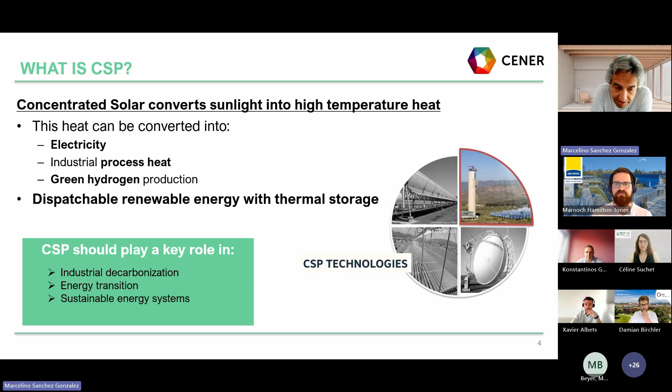So I really believe that this technology should play a key role in industrial decarbonization, in energy transition, and in the future sustainable energy systems. Why do we believe that solar towers are the technology that has more potential? Well, this is due to its features. In solar towers, we have higher concentration ratios, which allow us to have higher temperatures, and with higher temperatures we have two things: high conversion efficiency and also better energy storage.

In the case of the energy storage, we can store much more kilowatt hours at high temperature with the same volume, with the same, let's say, capital cost. And we have low cost and massive energy storage, that in our case uses molten salts mainly, and other materials. We are using environmentally friendly storage systems. And we can dispatch electricity during day and night.

What is the strategic value of CSP systems? We can provide the grid flexibility with the storage, but also reliability. I want to emphasize that we are using synchronous generation in the same way as any other power plant, nuclear power plants, and also coal plants. So we are providing the same kind of quality of electricity to the grid.

And as I already told you, we are using high temperature for industrial heat. We can produce hydrogen, and we have this environmentally friendly storage. So CSP tower is a unique technology that combines renewable generation with large-scale energy storage, which is critical for the energy transition.

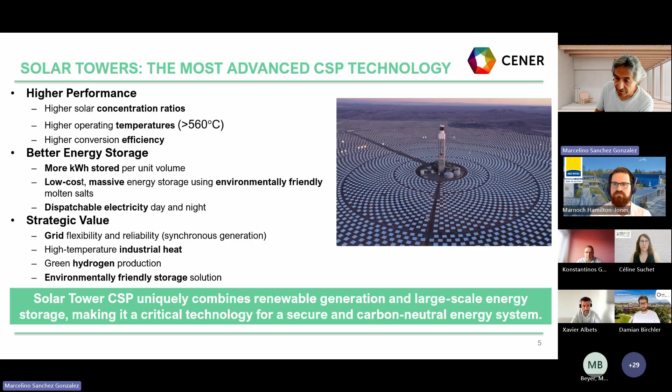Why do I believe that CSP is a good digitalization testbed? The solar towers are very complex. We have many heliostats, thousands of heliostats. We have to deal with thermal and optical interaction. We have to control this in a dynamic way. We have plants that are very data intensive with multi-physics. So we require advanced sensors, artificial intelligence prediction, digital twins, and real-time analytics.

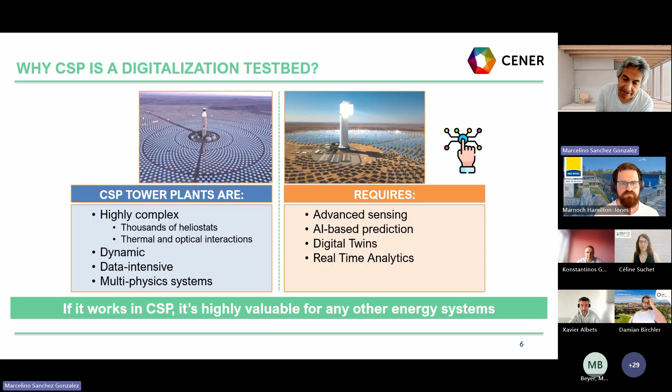If it works for CSP, it can work for any other energy system to be integrated in the energy transition. With digitalization, we are going to have smarter operation, lower operation and maintenance cost, higher reliability, better grid integration. We can provide industrial decarbonization, and in general, we can have a smarter energy transition.

Well, for me, digitalization is not only about handling data or even making digital twins. It's about having 3 layers. For me, one layer is measurement and monitoring. We need to have better sensors, better monitoring of the plant. We need to know how the plant is at every moment. We also need the modeling, to have the physical and performance models, the digital twins, and also the degradation model.

And finally, we have the decision making, with all this information to take decisions, where we can have machine learning or even predictive operation and maintenance, or also optimize the dispatchability of the energy to the grid. So to me, the value comes from the integration of all these layers.

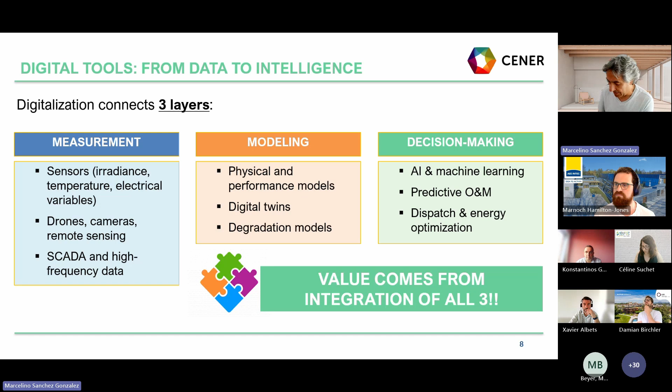Now, I'm going to talk about the project. The SunPeek project is the smart use of novel digital tools for advanced performance and reduced cost in CSP power plants. In this project, we are 9 partners. 5 partners out of these 9 are technological centers. 3 of them have a background in energy, like IMDEA Energy, ourselves, CENER or DLR. Our background is mainly energy.

What is the objective of this project? The objective is to improve the performance, reduce the operational maintenance costs, and enable a smarter plant operation. In this project, we develop the smart use of novel digital tools.

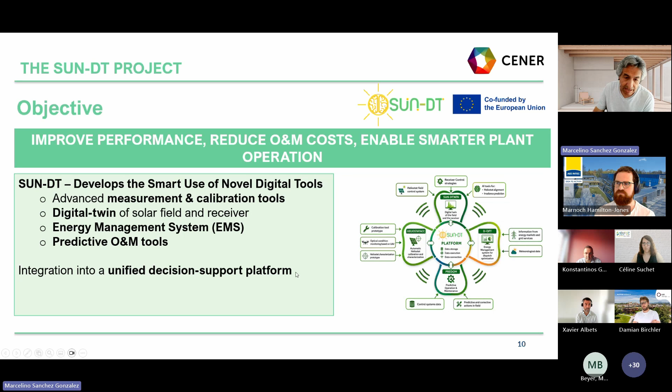We have advanced measurement and calibration tools in the project. We have also a digital twin of the solar field and the receiver. We have an energy management system, and we have also predictive operation and maintenance tools. If I go a little bit more into detail, we have these 4 digital tools.

One is devoted to the quality control of the heliostat and the calibration of the heliostat field, but for each heliostat; this is the tool that we call HELIOSTATACC. Then we have another tool that is more devoted to the digital twin and the control of the whole heliostat field and the receiver, and to control the flux maps on the receiver. This is an image of the flux map, and these are some images of how we control the heliostats.

Then we have another tool regarding the energy management system to optimize the dispatch to the grid. So in this tool, we have as input the meteorological data and also the needs from the grid, and from that we optimize the operation of the plant.

And in addition to this, we have another tool that is more devoted to predictive operation and maintenance, to the daily needs of the people that are doing the operation and maintenance in the plant. From this we have the predictive and corrective actions.

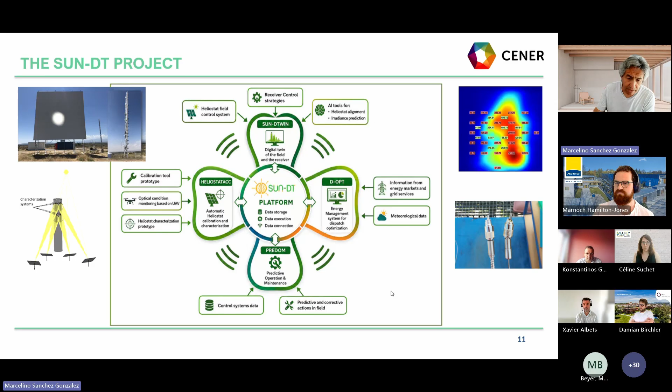Our methodology in this project has been designed with the idea of making a real technology transfer to the industry. So we have been working together with the industry from the very beginning. Together we have defined the digital tools that we believe are most useful to the industry and to the real needs of the technology. They are the 4 that I already mentioned, and they are all integrated in a common platform. I forgot to mention this before.

These tools are going to be tested and operated first in 2 experimental test facilities, one in Madrid and another in Jülich. This one belongs to IMDEA Energy, and this belongs to DLR. So once these tools have been tested, integrated and validated, they will be delivered to the industry, and the tools, to some extent, will be tested in real commercial power plants. So this is the scheme of the project.

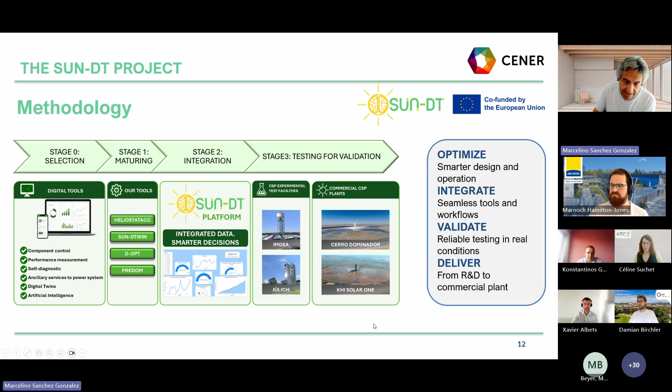Then what are the expected results? We expect to increase the overall plant efficiency by between 4 and 10%. This will come from the efficiency of the heliostat field and the receiver. We are going to improve this. Also, we're going to have fewer faults thanks to predictive maintenance, and less unplanned downtime.

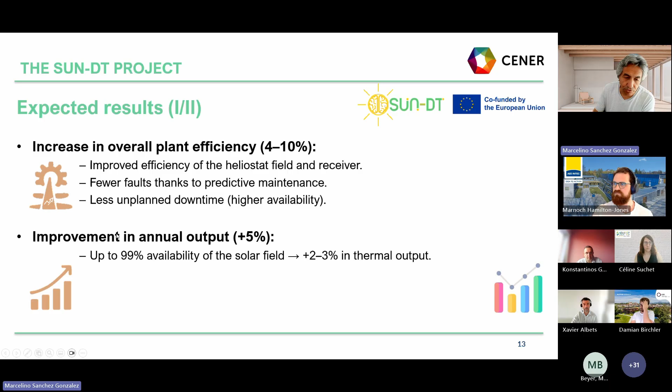We also believe we are going to have at least a 5% improvement in the annual output due to the greater availability of the solar field, and also an increase in the thermal output of the plant. In addition, we expect a reduction in OPEX of about 15% due to the automation of the tasks in the field and the reduction of human error, also to the predictive control and operation modes, and to the reduced need for corrective maintenance.

And also reducing CAPEX, because with the optimized design, we believe that we will not need to oversize the solar field as we are doing nowadays.

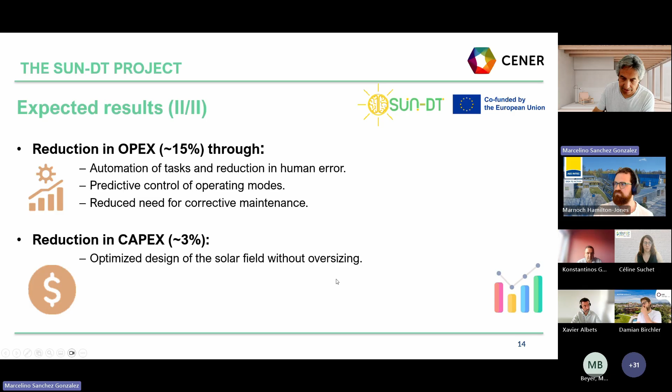What are the challenges and some opportunities? One is cybersecurity. You know that today it is very important. You want to avoid any cyber attack on the plants. Also, at the beginning, digitalization includes an increase in the capital cost, and we need regulation and collaboration.

What are the opportunities? New data-driven business models. We are going to have digital tools that are going to improve the design and optimization of the plant, and also better reliability and performance of the plant.

Then also, if I think about digitalization, not only in solar, but in the future, I think it's a very important opportunity, because we're going to shift from the model that we have today, a monodirectional model, to a model where we have not only producers, but also prosumers, people that consume and produce electricity, energy.

We are going to have real data, which gives us the opportunity to play with energy generation and storage. We can have greater transparency of the energy you are using. For instance, as consumers, you could choose which technology you want to use and why, and we will be informed to make energy decisions. So it will give us the opportunity to have better grid management and also a shared responsibility with our energy system.

The conclusions: CSP plus digitalization give us a better, more intelligent way of using renewable energy and integrating these energies in the system.

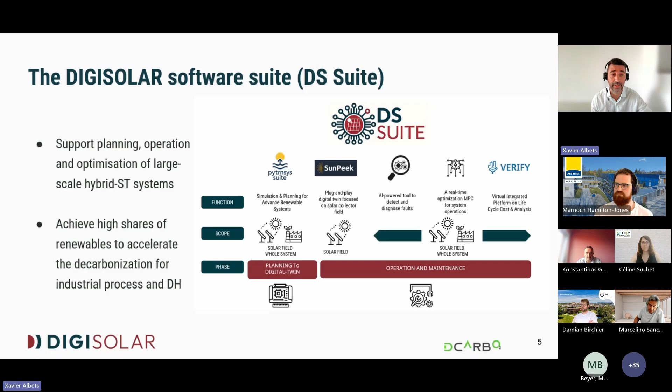One by one, as I said before, pytrnsys suite will be explained by Damian in more detail, but just to quote it here, pytrnsys suite is an all-in-one harmonized planning to digital twin at system level. It means it is a tool running TRNSYS in its core.

One can produce pre-designs, feasibility analysis, basic engineering, detailed engineering, and all that work in the building or in the construction of the hybrid solar thermal system can be also reused to produce a digital twin at the very end that helps us to understand what's happening in the plant, and then, of course, improving its operation and maintenance.

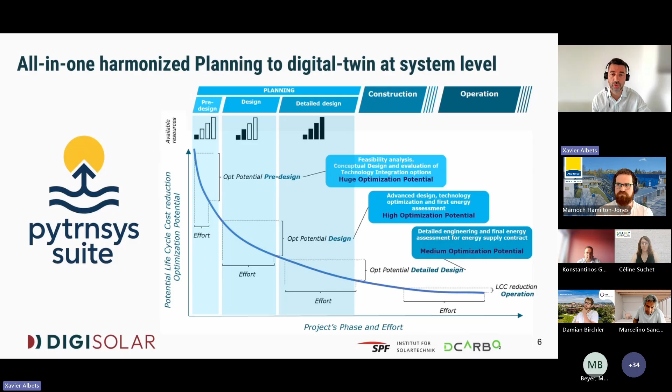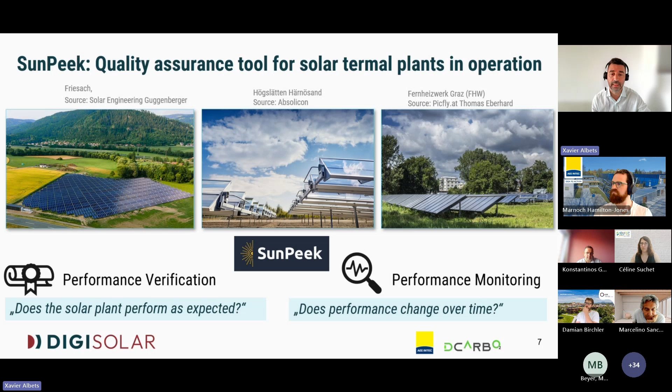SunPeek, Marnoch will provide us some details about the tool and the developments that are expected within the DigiSolar project, but it is a tool that is already existing and it will be improved along our project, and it's meant to produce performance verification of solar thermal fields following standards. And it's a tool that is very valuable because it can be connected to other tools that are also being developed in this project.

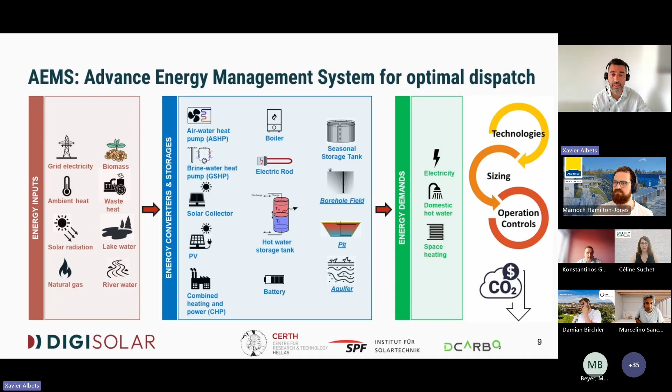There is also a fourth software module that will be included in the DS Suite, which is an advanced energy management system, which basically will help with two things. At the design level, it will help combining different hybridization renewable sources to produce optimal designs, and also when the plant is built and we have storages, power to heat, heat pumps, or other renewable sources combined with our solar thermal field, the software is going to produce an optimal dispatch, helping to reach optimal CO2 decarbonization or optimal costs by combining all these sources.

Finally, we also have a fifth tool, which is Verify, a tool that produces real-time life cycle analysis and life cycle cost KPIs, and that will be connected to the emissions trading system. And we believe it is a tool that produces very interesting information and data for solar thermal owners, as it helps quantify the positive impact on the environment produced by their systems, and it can also prove it by following standards ISO 14040 and 14044, which gives a lot of credibility to these installations.

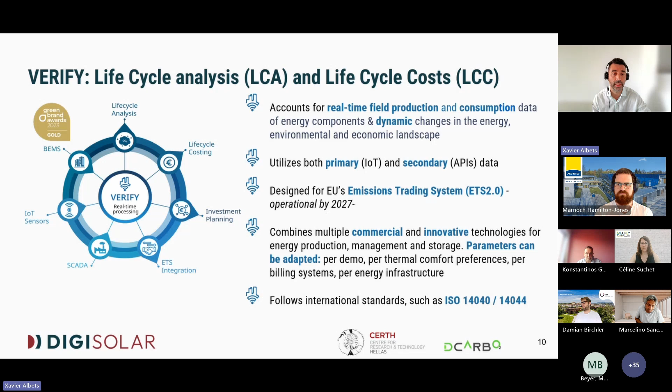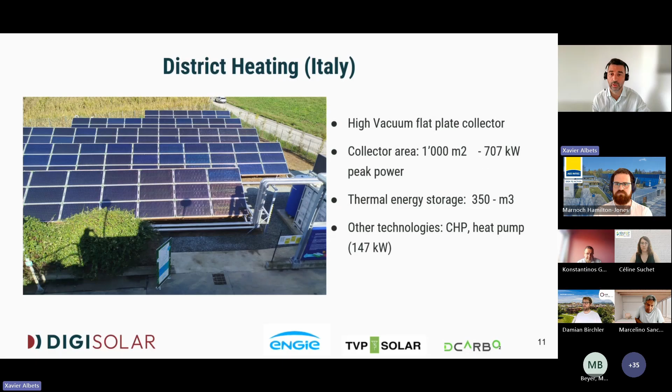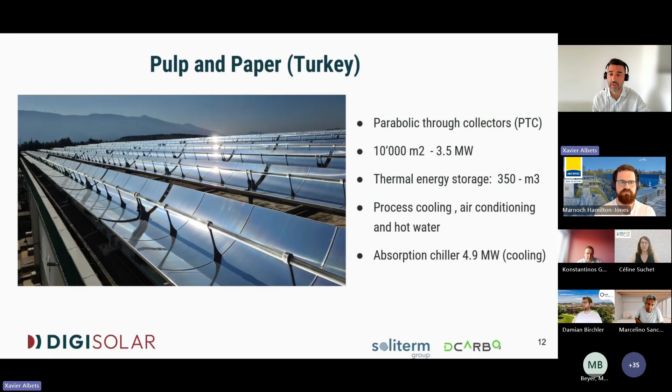As I said myself and also in the video, we are going to demonstrate this software in 4 different real facilities. The first one is a district heating in the north of Italy with a 0.7 megawatt collector area using high vacuum flat plate collectors. There is another big installation, a pulp and paper mill in Turkey, which is using parabolic trough collector technology, so increasing slightly the temperature, and it's producing 3.5 megawatt thermal.

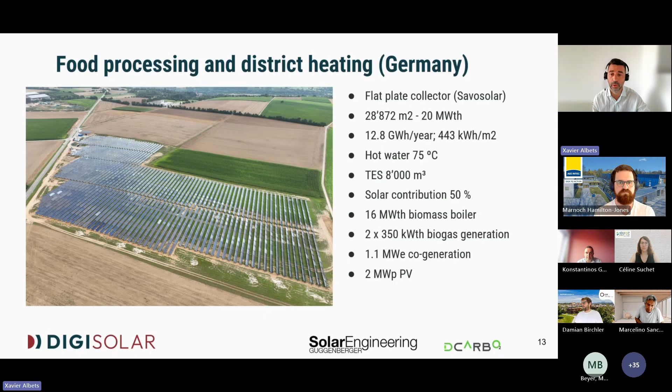There's a third installation in Germany, a very large 20 megawatt flat plate collector field that is feeding food processing and a district heating in the neighborhood. And finally, there is a pulp and paper mill in Greece that is being built as we speak, that is going to combine a high vacuum flat plate collector solar field together with a heat pump. Both will work together using the advanced energy management system of DIGISOLAR to produce heat, and this heat is going to be utilized by the mill to produce paper.

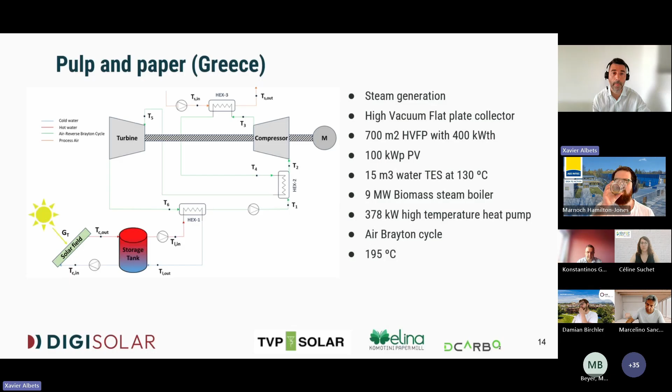So again, thank you everybody for listening to this short introduction about DIGISOLAR. Now my colleagues Marnoch and Damian will present with more technical detail 2 of the tools that will compose the DS Suite, and I hope you will find it very interesting.

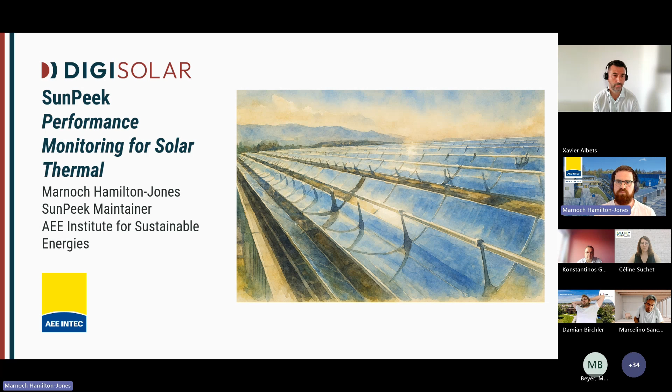Right, yes. As Xavier and Céline already mentioned, I'm going to give you a little bit more detail on the SunPeek tool, which forms part of the DS suite that we're building in the DIGISOLAR project. SunPeek is a performance monitoring tool for large solar thermal collector arrays. The key point about SunPeek is to provide standards-backed performance verification and monitoring for solar thermal plants in a way that is robust and transparent and trustworthy. I've mentioned these 2 phrases already.

SunPeek is focused on the operational phase of solar thermal plants. There are a number of tools out there for the design phase, including ones that are included in the DIGISOLAR project. We are focused on the post-design phase, on the operational phase, enabled by the ISO 24194 standard that came out a few years ago. And we aim to do 2 things during that phase. We aim to do performance verification, think of it as a one-off check that the plant performs as well as expected, and performance monitoring, which is an ongoing process to see how the performance of the plant evolves over time, which can potentially be used to detect slowly evolving faults and performance anomalies and rectify those.

Very quickly, how it works. We take the measurement data, so the actual performance of a solar thermal array, and we compare that with the expected performance computed using a physical model that is given by the standard. And the important thing is that the expected performance that we compute takes into account the actual radiation, the ambient temperature, the flow and return temperatures from the rest of the system, all of which affect the performance of solar thermal plants. So the expected value we come up with is the value that can be expected from those particular collectors under the conditions they're actually seeing. Which means that if the measured value is not relatively close to that, then we know that something else is going on that is related to the collectors themselves.

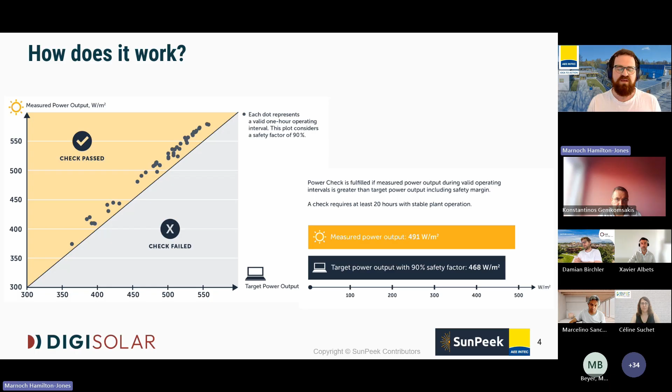SunPeek is very much focused on the collector field. So we can evaluate whether the collector field is performing normally given the operating conditions it's in. Those are affected by the rest of the system, which SunPeek does not evaluate. And there are other tools in the DS suite, for example, pytrnsys, which Damian is going to present after me, which addresses the wider system.

Very quickly, SunPeek is designed to integrate with the existing instrumentation and be very quick to set up for solar thermal plants as they are actually built and instrumented in the real world. In order to add a plant, you put in some metadata like the location, put in the type of collectors that are in use, that is very relevant. Configure the measurement channels, so map the raw data channels that are configured in the SCADA system or whatever data acquisition system exists at the plant to specific semantically meaningful data channels within the software, and then upload some data, set some safety factors which depend on a few other things, and get a result.

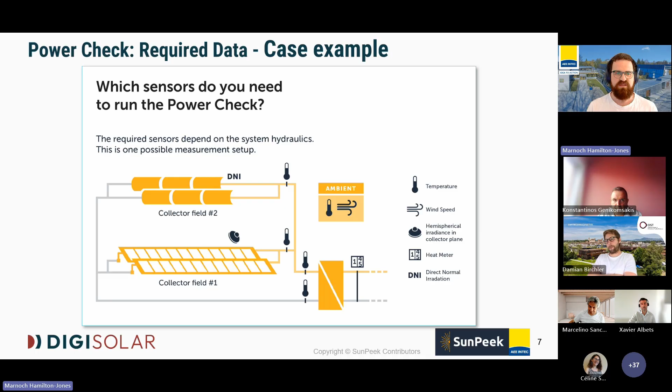This is designed to be a very quick tool to use on a very wide range of solar thermal field configurations. This is one example configuration, and this is the sensor configuration that you would need for this setup. These are sensors that exist in the vast majority of fields that are configured like this, because they're generally required for the control system anyway.

So that's what SunPeek does at the moment. As part of DIGISOLAR, we are building the DS suite, as Xavier mentioned, and SunPeek will be integrated as a core component of that, and also we will be adding functionality to SunPeek to enhance the capabilities of the whole suite, make it work better with the rest of the tooling.

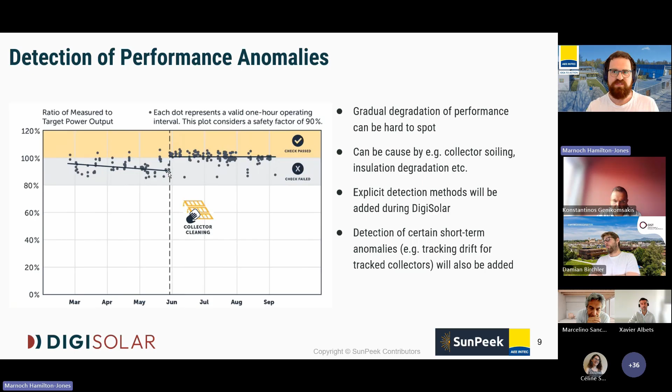This is the real advantage of this project, integrating all of this tooling together to form one coherent system. We are also going to be implementing a dynamic performance assessment method. This is somewhat an extension of what exists from the ISO standard, which is a static assessment method. There are strict filtering criteria in the standard to pick the time periods that provide relatively stable operating conditions.

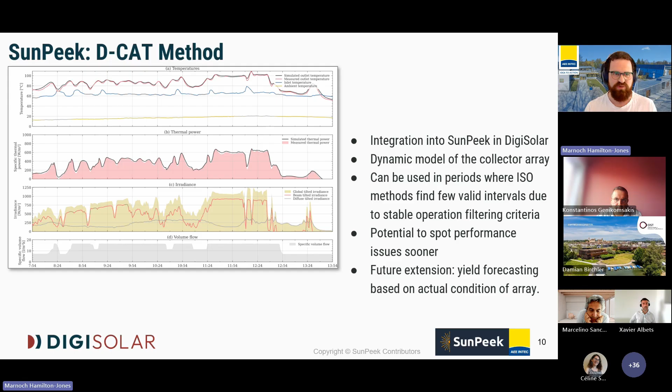And we also do what we call context-aware data validation and data cleaning, which means, for example, that an ambient temperature sensor that's reading 70 degrees Celsius, even this week, that would clearly not be a valid ambient temperature sensor value, and so we can remove those values that are clearly invalid based on known context about the sensors.

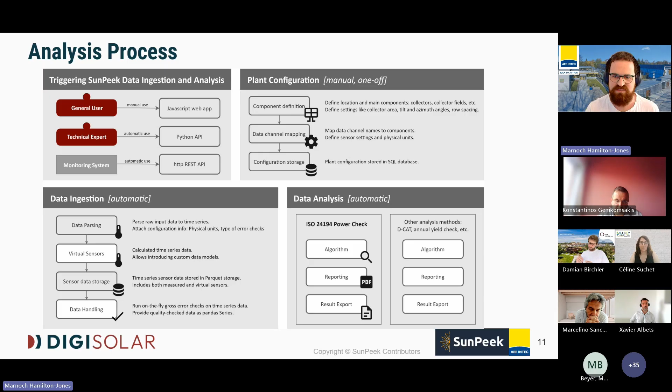As part of the DIGISOLAR project, we're going to be moving that functionality into a new data management platform, which will form a core component of the DS suite. And that will be the central time series data storage and data management component for the suite. And that will make that functionality available for all of the other tools in the suite to leverage.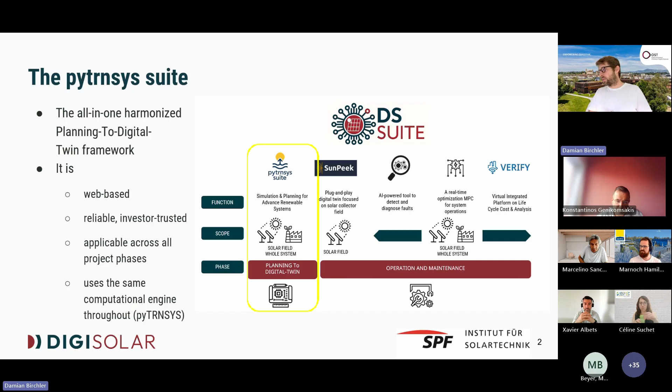And within the DIGISOLAR suite, the pytrnsys suite is connecting to other tools, of course. They're all integrated together into the DIGISOLAR suite. In particular, the fault detection and diagnosis tool will be using data or simulation results or the mismatch between the two from the pytrnsys suite. And also the TRNSYS models within the pytrnsys suite are used to validate the model predictive control or the advanced energy management system tool, which is also in here under real-time optimization MPC for systems operations. Right, here we see again the three different phases that our tool aims to support.

And you see that the feasibility or pre-design phase and the design phase are currently under development, and the whole digital twin operation phase part will still be developed within the DIGISOLAR project. And the feasibility pre-design part is, as I've said already, an online tool. It runs in the cloud. You can access it with your web browser. It should be easy to use.

At this stage, you cannot change your system. You cannot change the hydraulic connections and so forth. But you pick a predefined configuration for a system and change the parameters for your pre-feasibility study, like the relevant ones: your storage size, your collector field size, your collector type, etc.

So you don't need to model yourself. You pick a pre-configured model, input the parameters and run. And the simulation will be run in the background in the cloud using the pytrnsys suite. And then once you want to transition, well, maybe I'll go into the individual phases more in detail, but let's go one by one.

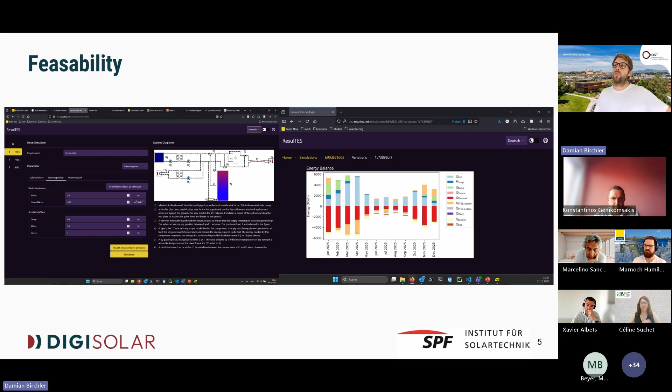So here you can see a bit more graphically what the tool looks like. So the pre-design feasibility tool: on the left-hand side, you see the input mask with some parameters as an example that you can input here, and then on the right-hand side, at the moment, you get nice plots. For example, energy balance plots or state of charge of storages, etc. We will be adding further KPIs as well, more on the report side.

So now let's go to the design phase, where you as a user can also use the pytrnsys tool, which is used in the background for the feasibility phase. When you move from the feasibility phase to the design phase, you can export the pytrnsys project, download it to your computer, and use it there. And there you have complete flexibility. You can change the control. You can add additional hydraulic connections. You can do whatever you want.

At this point, I have to say a TRNSYS license will be needed because you'll be running the simulations locally on your computer, and for that TRNSYS is needed. Some of you might know that the default TRNSYS license is quite expensive, but there are also talks with the TRNSYS people about limited licenses and so on, but this is still all very much in progress.

So what does the GUI look like? It's running locally on your computer. Actually, I have started it up here. When you export this project from the web UI, you will get such a system, but you can also then introduce, maybe you have an air source heat pump somewhere in there as well. You can introduce that and then change your system accordingly.

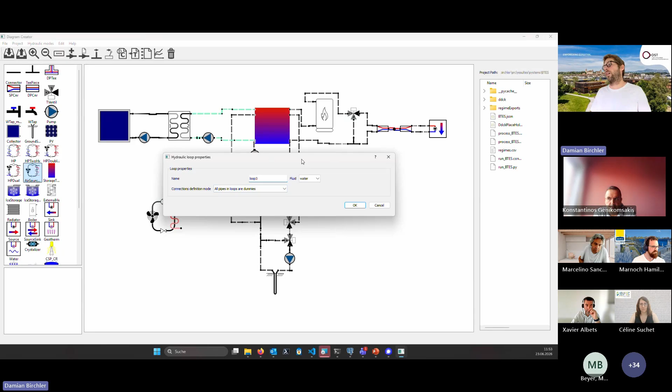Now I need to share again, I think. Oops.

Yes. And then the pytrnsys GUI will just spit out a huge text file, which looks like this. Not really meant for human consumption, but this is then the input for the TRNSYS computational kernel, which will run the simulation for you and

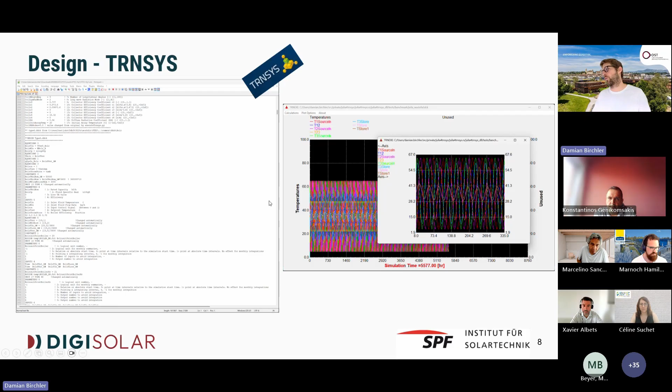produce the results. And then finally, in the operation phase, the pytrnsys suite will take the models from the previous phases and turn them into a digital twin, run it in the cloud, connect them with real data coming in from the plants, and do performance evaluations. But as no development has been conducted so far on this tool, I can't really show you anything there at the moment.

Yeah, so then the pre-feasibility UI interface is actually already online. You can register to get an account, and if you're planning to do that, get in contact with me, because you need a registration code. And once you've registered, you can log in with your username,

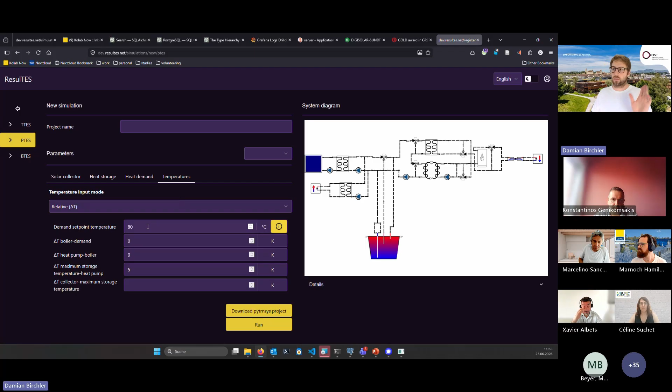play around with it, change the relevant parameters, run a simulation, wait for a while. You'll see the progress. You also see an estimated time for when it's done. You can come back to it later. And once the simulation has finished, you can look at the current result visualization that we have.

But I have to say that this is still very much a work in progress. So expect some things not to work. Also, your data will at some point probably be deleted. So it's really just to poke around with. Don't use it for your project yet.

So what are we going to do within DigiSolar? We'll be adding new systems on the one hand. So three systems based on the plants which are included in the project, and we're going to do this for the plant in Turkey, in Germany, and in Greece. And also we'll be adding 5 representative big systems, representative of commercial hybrid solar thermal systems. You can think of them as a template. These probably will be used in a pre-feasibility study, and then maybe downloaded locally and adjusted to your actual project.

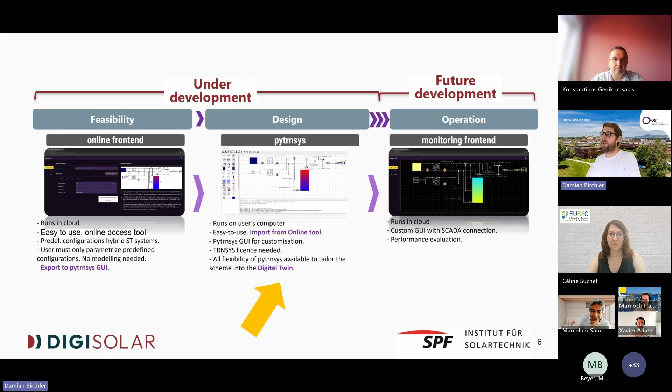So yeah, as you said, it covers almost the whole project life cycle. But I would say it's quite heavy on the planning, say feasibility, and then design phase. Historically it was in that corner. But we will add this third pillar, which is monitoring / digital twin, to actually connect the planning phases to the operation phases.

And maybe what you alluded to, Xavi, was that we're going to add these 5 representative models. Even though the models are fixed, we will try and pick them to be a good starting point for people, usable in the pre-feasibility study for their potential project, and then also as a starting point that people can modify in the design phase within the pytrnsys GUI, the local tool into which they export the project from the online user interface.

I hope that answered the question. Thank you, Damian, for elaborating more on the pytrnsys tool.

I don't see any other question in the Q&A box, but I would like to take this opportunity to start asking questions to all the presenters, hoping that this will also trigger interaction from the audience. I would like to start with Marcelino from TENER and the SUN-DT project.